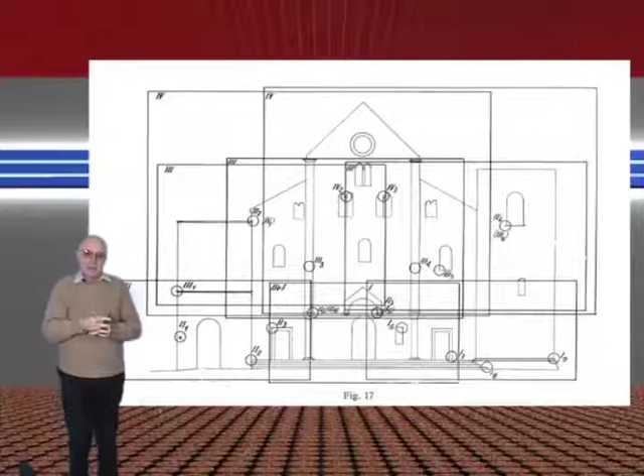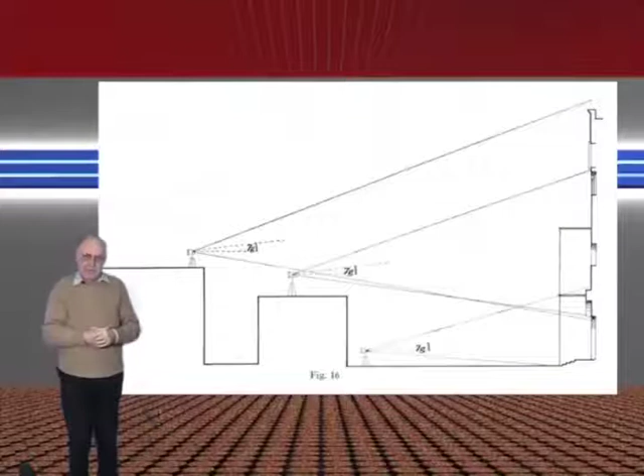The Basilica of San Nicola main elevation was detected with photogrammetry in 1964, with the Wild P30 photo-theodolite that we've already seen before. Taking a look both at the planimetric scheme of the shooting and at the altimetric scheme, we realize the time required for the photogrammetric shot of the elevation only. Keep in mind that the photo-theodolite P30 was born for topographic purposes. That is, it was used to integrate the shots taken from the plane for those areas of the ground not visible from above.

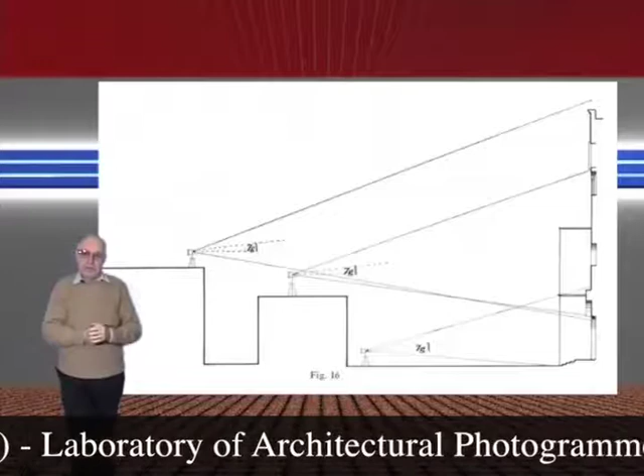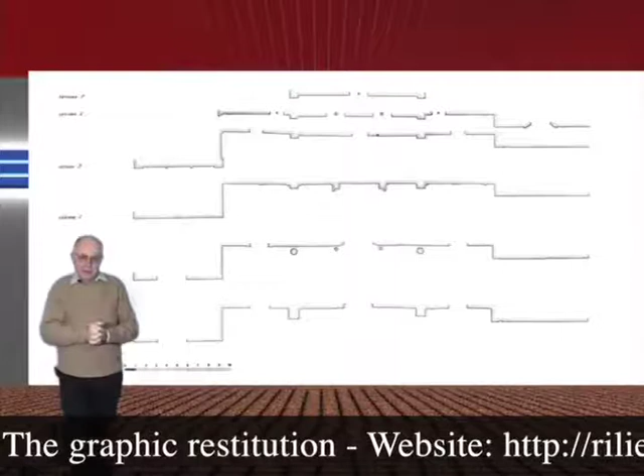So it had an inclination upwards of 7 degrees, and down 7 degrees, 14 degrees and 21 degrees, in fact, in the elevation chart. We see that to shoot they were forced to stand on the buildings facing the facade at a certain height in order to detect the upper parts. The restitution was a composition and retraced the basic lines.

In the 80s, with that metric Wild camera, brand new with a super wide angle, with one shot the entire facade was taken. From this comparison we see the parallel between a slab of the P30 and a slab of the P31. Impressed from the same point of view, you easily realize that the former is a true telephoto lens, and the other a super wide angle.

The downside, for heaven's sake, is that with the telephoto lens we have no perspective deformations, while with the wide angle we always have large perspective deformations. However, the pros and cons must always be evaluated. In addition, if we now try to enlarge the frame of the P31 and we superimpose it on the graphic relief obtained with the return of the shooting of 1964,

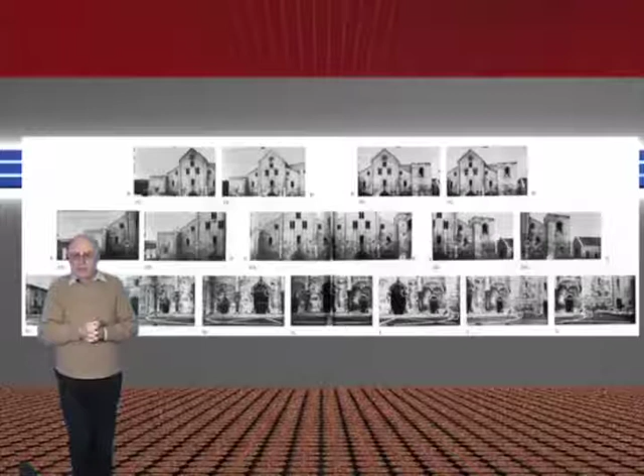we easily understand the shooting times have been reduced to a minimum. And consider that one shot with a metric chamber takes 10, 20 minutes, and we are already at very long times, times that correspond to a single photo shoot with the photo-theodolite. Keep in mind that with the metric chamber the base was made with the normal case and everything was done. 10 minutes, 20 minutes was already too much.

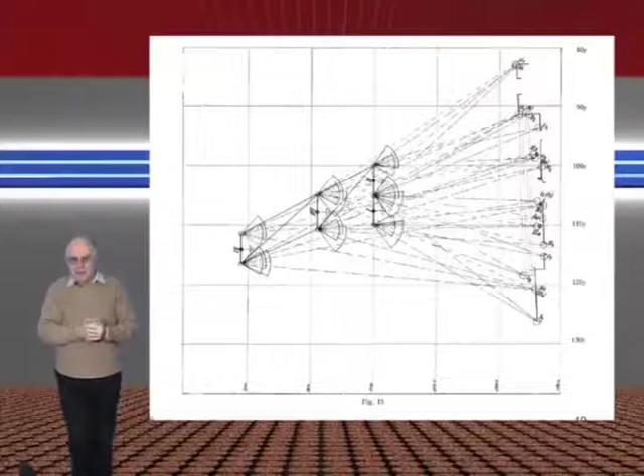With the photo-theodolite it was necessary to make several photogrammetric shots, and from every station it was necessary to carry out topographically the relief of a certain number of support points to verify the three-dimensional model. Also because, if the normal case was not used, often to make the most of the frames you also got to shoot with converging axes, and therefore it was necessary to detect the angle of inclination of the chamber, and a series of data not at all obvious.

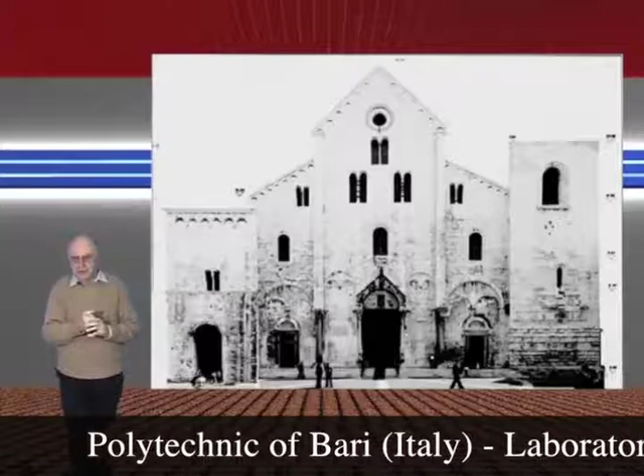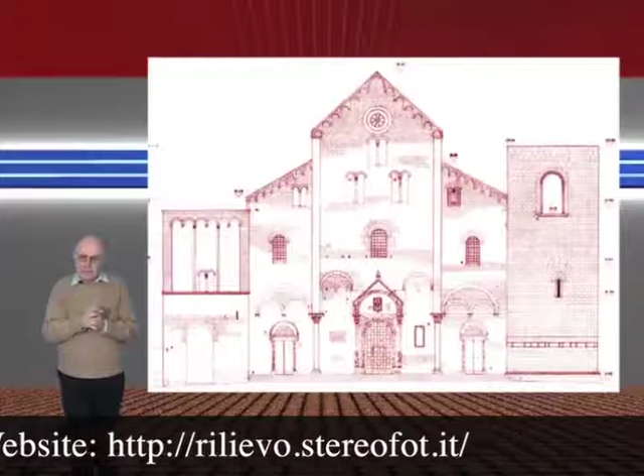Let's see how, with the frame of the P31 enlarged to scale and treated with a photo editing program, we get the prospect of the Basilica of San Nicola, perfectly scaled, which can also be detected via the network, and in orthogonal projection. Said among us, it is no longer the prospect of the Basilica, because the two towers ahead are flattened and it is almost unrecognizable. Even what seemed like a great discovery at the time is to be questioned.

The photoplan. We will see these types of returns in more detail later. But this already gives an idea of how in 15 years things have changed. If you think now of the ability to take frames over the network and make a return with a three-dimensional modeling program, we are already at a fairly strong revolution.